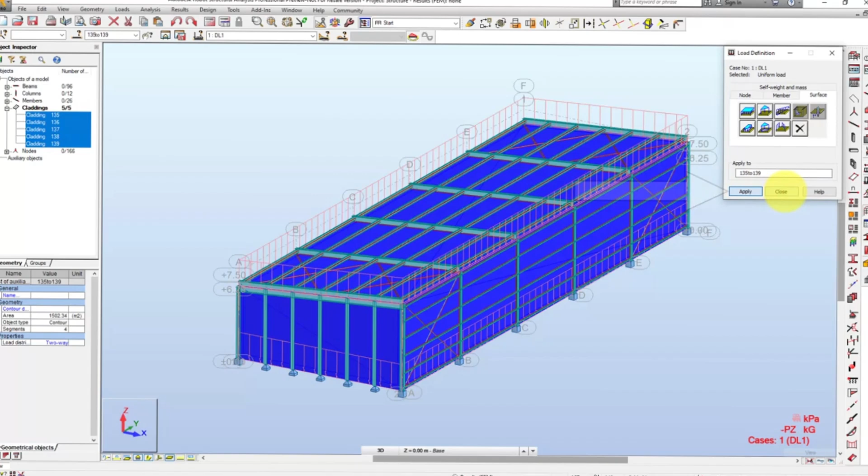Next, define the load case for snow. From the toolbar, expand the Cases dropdown and select SN1, the name for the snow load. From the vertical toolbar, select Load Definition. The Load Definition dialog displays again. Once more, the snow load case will be a Uniform Planar Load. Open the Surface tab and select Uniform Planar Load. The Uniform Planar Load dialog displays. In the Values group, in the Z field, enter -0.24, and then select Add or press Enter to add the load.

The snow load will only be acting on the roof cladding. To apply the load, in the Load Definition dialog, select within the Apply To field, and then, in the drawing area, select the roof cladding. The numeric value assigned to the roof cladding displays in the field. In this instance, it's 136. Click Apply, and then click Close.

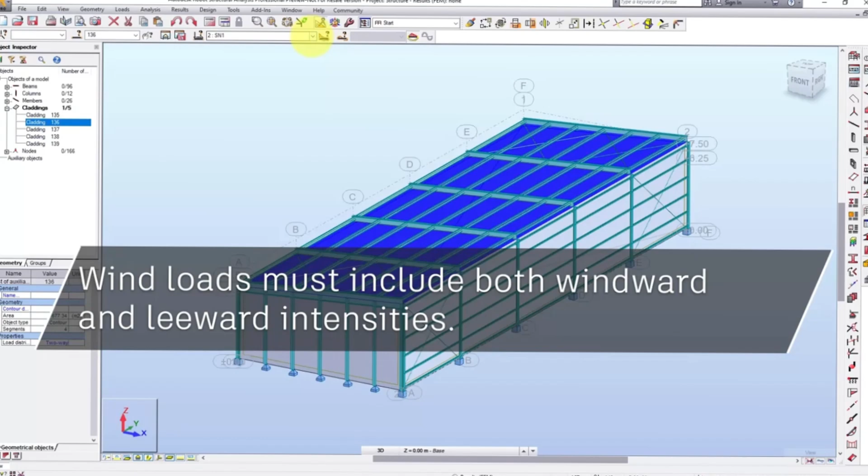Next, define the load cases for wind. The wind loads are defined as constant loads on wall panels and a contour load on the roof panel. In addition, wind loads must include both windward and leeward intensities. The definition of wind load cases uses the local coordinate system. To begin defining the first wind load, from the toolbar, expand the Cases dropdown and select Wind 1.

Next, to verify the orientation of the local Z-axis on the claddings, open the Local Systems dialog by selecting View, Display. The Display dialog opens. From the sidebar, select Model, and then, from the window, expand Local Systems. Check Local Systems of Panels and Cladding. Click Apply, and then click OK. Arrows display in the drawing area, indicating how the panels are oriented. All claddings should be oriented outward. In this example, the gable wall is oriented inwards.

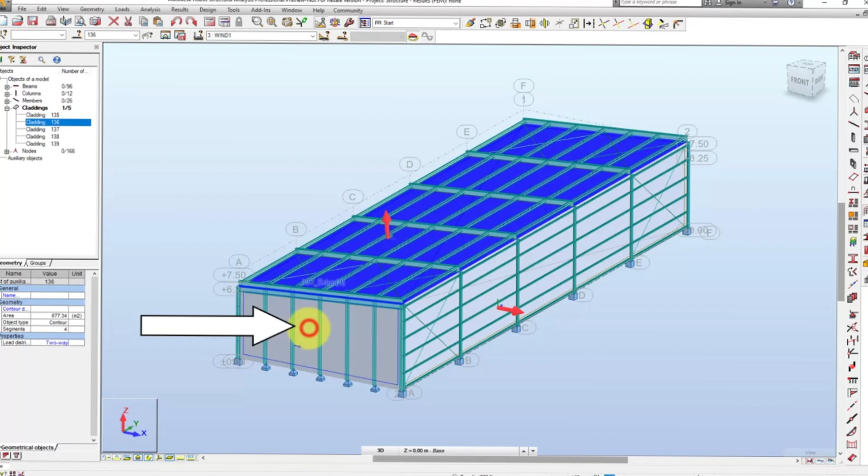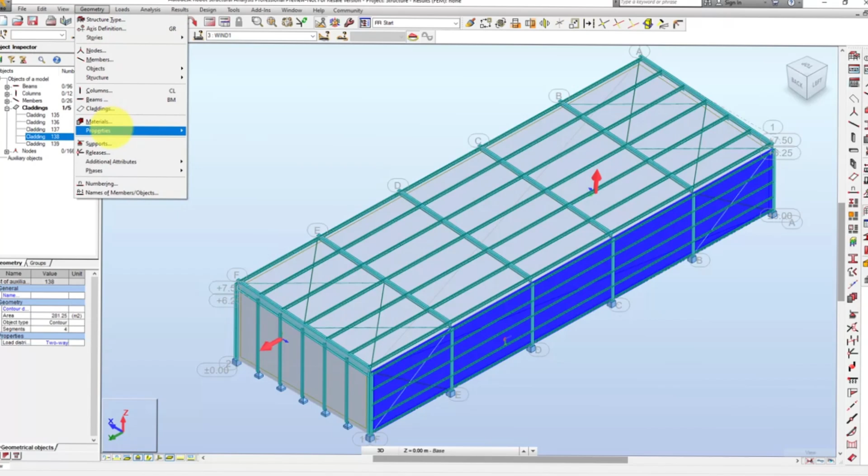To change the orientation, select the cladding, and then from the text menu, select Geometry, Properties, Local Panel Direction. The Local System Orientation dialog displays. Check Change of Local Z-Axis Sense, and then click Apply. The arrow on the cladding updates to indicate an outward orientation. Use the view cube to rotate the model to ensure all panel orientation is outward. Change any orientation that indicates inward using the Local System Orientation dialog.

Once the orientation of all the claddings indicates as outward, from the vertical toolbar, select Load Definition. When defining wind loads, you will need to define a pulling pressure or positive load and a pushing pressure or negative load. Open the Surface tab and select Uniform Planar Load to open the dialog. In the Z field, enter -0.39 for the pushing pressure.

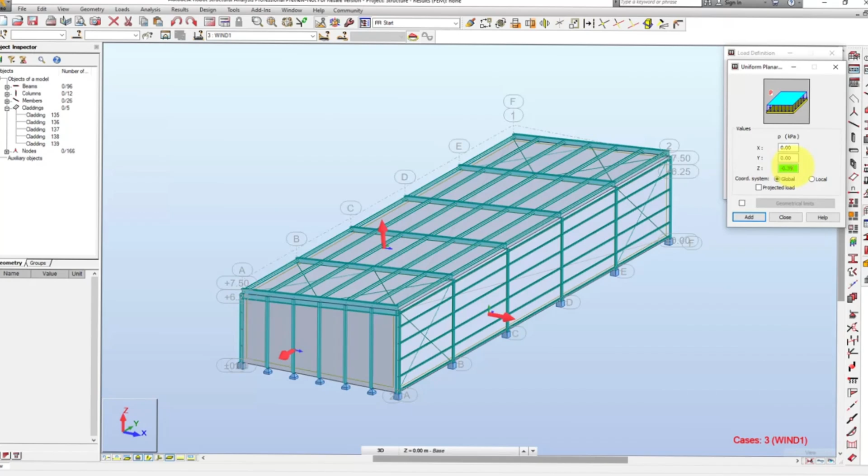In the coordinate system, select Local. Click Add. Back in the Definition dialog, click within the Apply To field and select the windward panel, which in this case is the far left cladding, number 138. Click Apply. Open the Surface tab again.

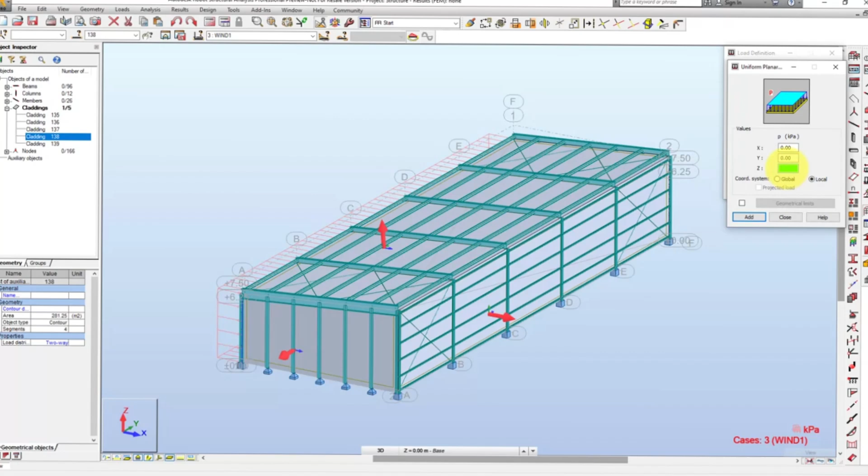Select Uniform Planar Load, and then in the Z field, enter 0.01 for the pulling load. Select Add. In the Load Definition dialog, select the previous panel number in the Apply To field, and remove the value. Then, in the drawing area, select the leeward or far right panel. The panel number displays in the Apply To field. Click Apply.

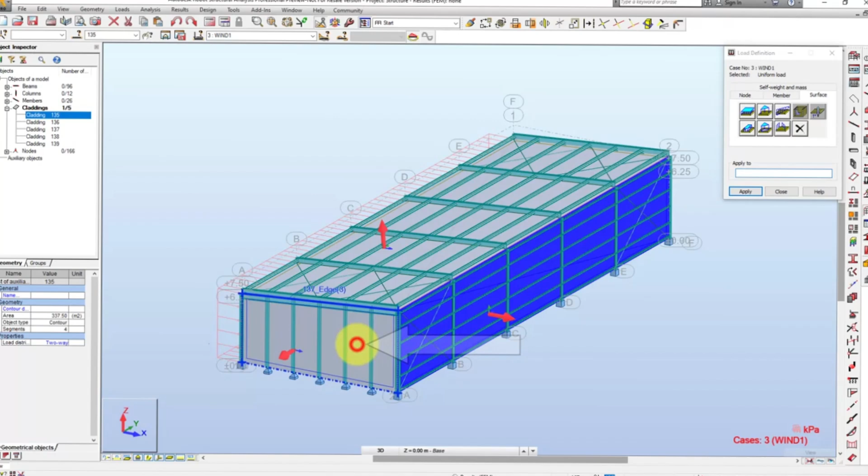Again, from the Surface tab, select Uniform Planar Load. Enter 0.05 in the Z field, and then click Add. In the Load Definition dialog, select the previous panel number in the Apply To field and remove the value. Then, in the drawing area, select the gable wall that is visible, and from the Object Inspector, select the other gable wall. The panel number displays in the Apply To field. Click Apply.

Now, from the Surface tab, select Uniform Planar Load on Contour. In the Z field, enter positive 0.56. Again, under Coordinate System, select Local. Next, select Contour Definition. Now, in the drawing space, select 4 corners to apply the load to 1/6 of the roof structure. Click to place the points in succession, ending on the initial point selected. The coordinates for the points list in the Contour Definition window, and the Uniform Planar Load on Contour dialog closes automatically.

Again, in the Load Definition dialog, remove the existing value in the Apply To field. In the drawing space, select the roof, and then click Apply. The Contour Definition needs to be repeated for the middle third of the roof. Again, from the Surface tab, select Uniform Planar Load on Contour. In the Z field, enter 0.13.

Select Contour Definition, and then in the drawing area, select 4 corners to apply the load, again placing the points in succession and ending the selection with the initial point. Since the roof is already selected, in the Load Definition dialog, click Apply. Finally, define the contour for the remainder of the roof.

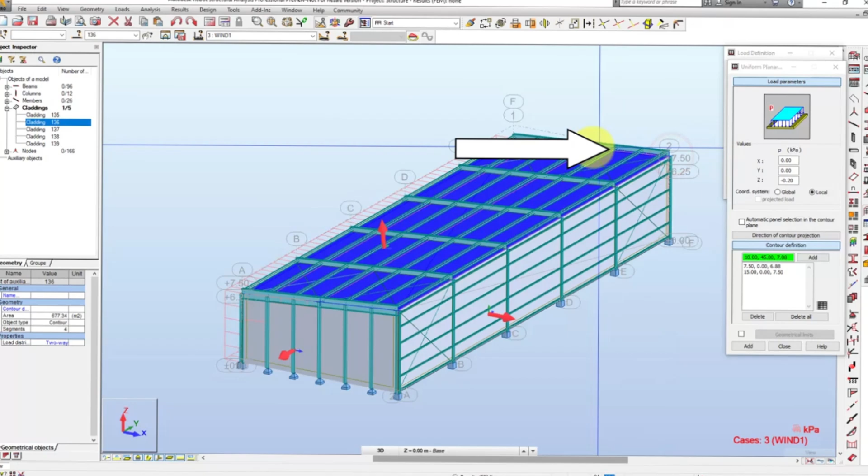From the Surface tab, select Uniform Planar Load on Contour. In the Z field, enter -0.20. Again, select Contour Definition, and in the drawing area, select 4 points to define the remainder of the roof. Again, since the roof is already indicated in the Load Definition field, click Apply. Click Close.

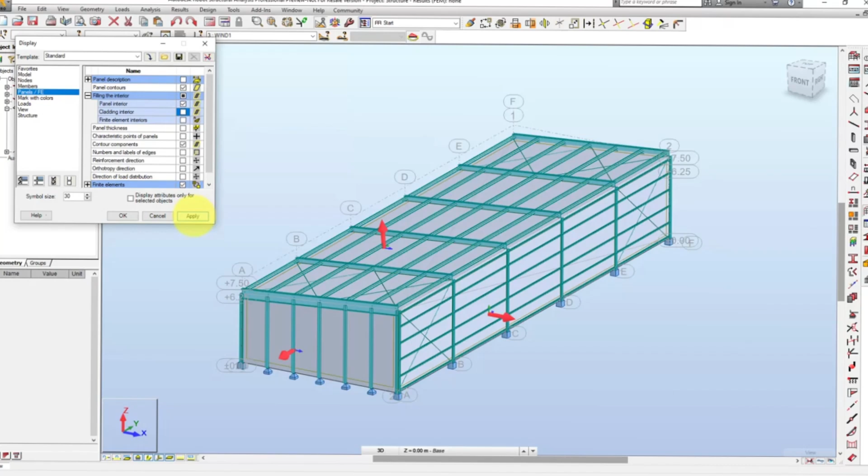To inspect the load case, from the text menu, select View Display. From the Display dialog, from the menu, select Panels. Expand Filling the Interior, and then deselect Cladding Interior. The interior of the cladding in the drawing space becomes invisible. From the views, enable the load symbol and load value descriptors. The values for the load cases display in the drawing area.

Next, to define the second wind load, you would need to repeat the process with the following load case data for a uniform planar load. For the windward wall, the Z field needs -0.48. For the leeward wall, the Z field needs 0.01 added. For the gable walls, the Z field needs 0.05 added.

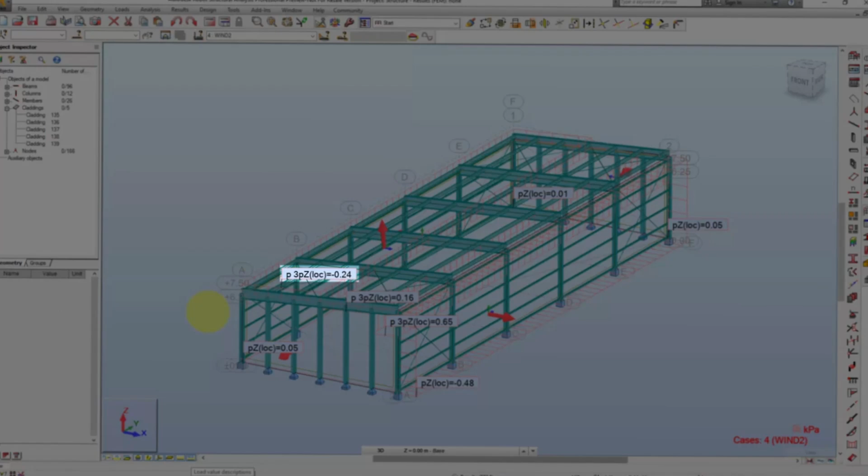Uniform planar loads on contour would need to be defined for the roof as well. Again, defining 3 of the same sections of the roof: for the windward 1/6 of the roof, the Z field would be set to 0.65. The adjacent 1/3 of the roof would be set to 0.16, and the remainder of the roof would be set to -0.24.

Next, set the live load as the active case. From the toolbar, expand the Cases dropdown and select LL1. From the vertical toolbar, select Load Definition. The Load Definition dialog displays again. Open the Member tab and select Member Force. The Member Force dialog displays. In the Values section under F, in the Z field, enter -10.

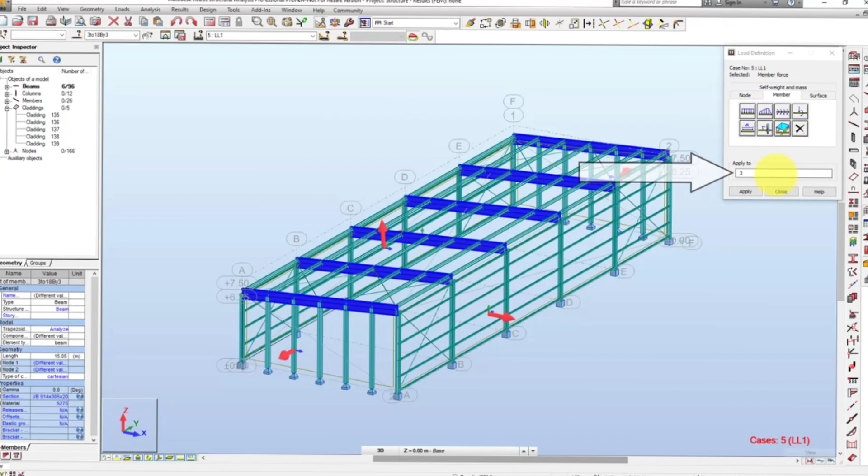Click Add. Back in the Load Definition dialog, select the Apply To field, and then in the drawing area, select the first rafter and right-click. Now, from the menu, click Select Similar, select by cross-section. All rafters are selected. Click again in the Apply To field for the numbers of the rafters to populate. Click Apply, and then click Close.

Now that all loads are applied, you can inspect each one from the toolbar. Expand the Cases dropdown and select the Dead Load. The drawing area updates to display the selected load case. Expand the Cases dropdown again and select the Snow Load. Again, the drawing area updates. Inspect each load to ensure it is accurate.

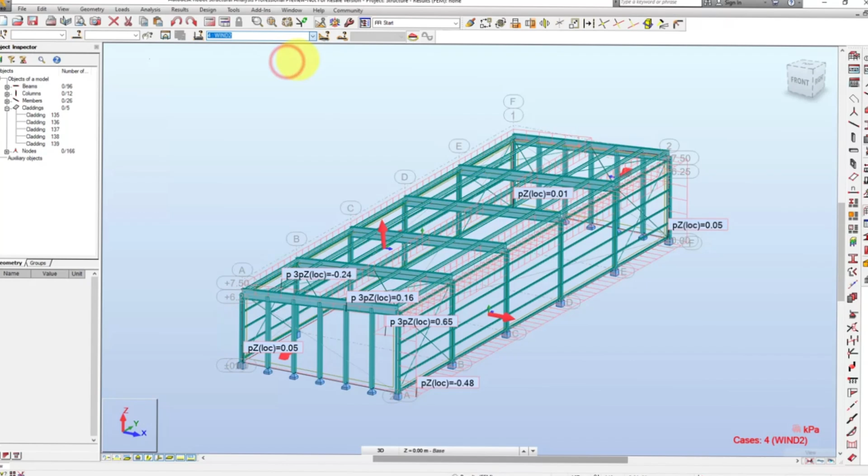Finally, to display the load table, from the text menu, select View Tables. The Tables, Data, and Results dialog displays. Check Loads and then click OK. From here, you can inspect and modify the loads. From the bottom of the window, click Cases to inspect the load case definitions.